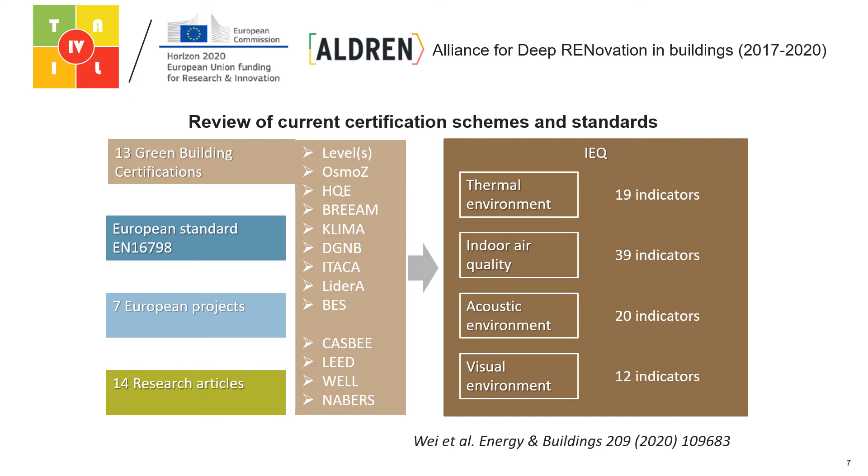And we call this rating TAIL, and the name of the scheme is coming from the four major components of indoor environmental quality, which are thermal environment, acoustic environment, indoor air quality, and luminous visual environment. Each of those components is rated based on four categories of quality, from category 1, the highest, to category 4, the lowest. This classification follows the one proposed by the standard EN 16798 that is supporting the EPBD, or Energy Performance of Buildings Directive.

And the quality of each is categorized based on these categories and given a color from green to red, where green indicates the highest quality. And then, depending on the quality of the four components of indoor environmental quality, the overall indoor environmental quality is determined, and it is characterized by the Roman number in the middle of the scheme, the Roman number and the color.

And of course, the Roman numbers follow the categories between 1 and 4, where 1 is the highest and 4 is the lowest. Of course, we would like to know the relationship between the components of indoor environmental quality and how they affect or impact the overall indoor environmental quality.

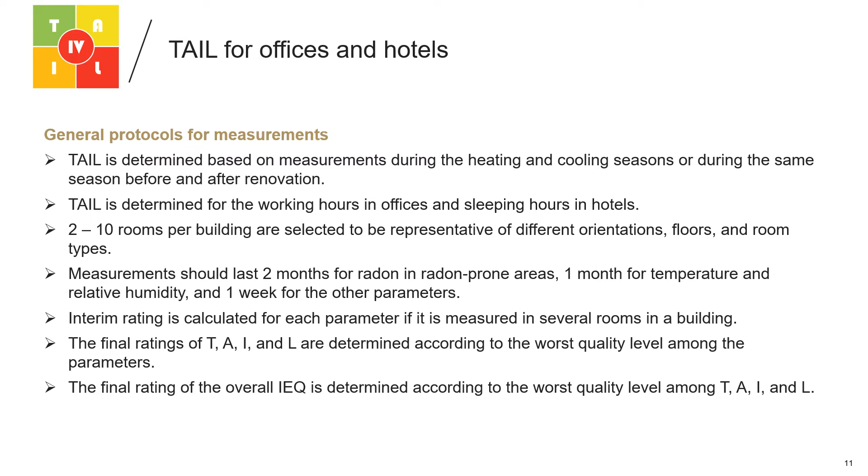However, we realized that during the process of construction and also renovation of buildings, there is one important part. We measured the performance of buildings using TAIL in different office and hotel buildings, and this is just an example of the parameters that were measured according to this methodology.

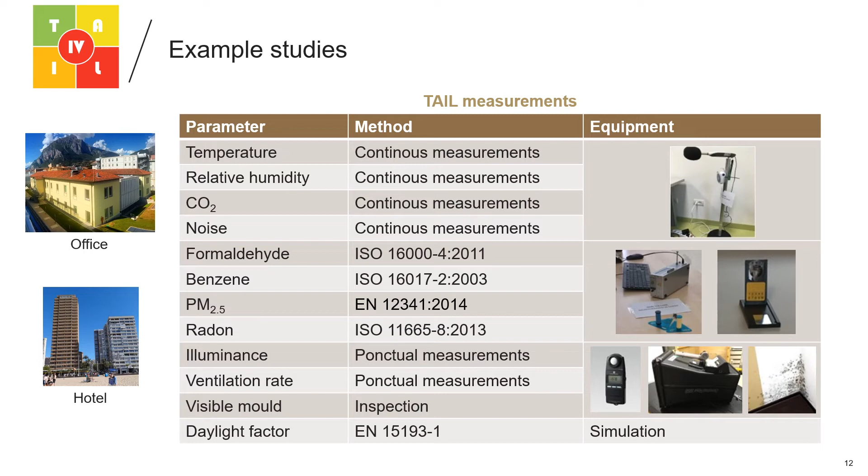And we determined that buildings perform differently with respect to the TAIL parameters. However, the overall indoor environmental quality could be identical, because it is decided by the worst performing component of indoor environmental quality.

To the test, the PredicTAIL tool. Well, this tool is once again allowing a prediction using modeling, and only modeling, of the parameters before the building is even renovated, to select the best scenario for renovation. And in order to test this tool, we defined

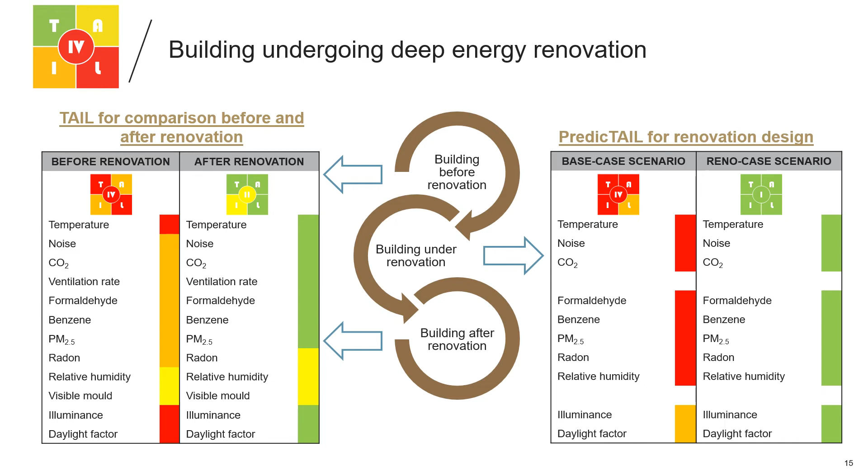four scenarios. Two scenarios in which the building is renovated to achieve the best energy performance or moderate energy performance, and two scenarios in which the building is renovated to achieve the best indoor environmental quality and moderate indoor environmental quality. Why did we do it? The major reason was that we wanted to find out whether the PredicTAIL tool would be sensitive enough to detect changes.

So in these scenarios, we selected realistic scenarios, but we made sure that there is a difference between those scenarios and that a difference could be expected. We wanted to see whether Predict TAIL would be sensitive enough to detect those differences. And as I said, we used different simulation tools to predict components of indoor environmental quality.

For the thermal environment, we used TRNSYS. For indoor air quality, we used MATHIS-QAI. For the acoustic environment, we used ACOUBAT software, and for luminous we used PHANIE. And the idea is that in the future we will be able to use any simulation tool to make this prediction. And the prediction was done for the entire year.

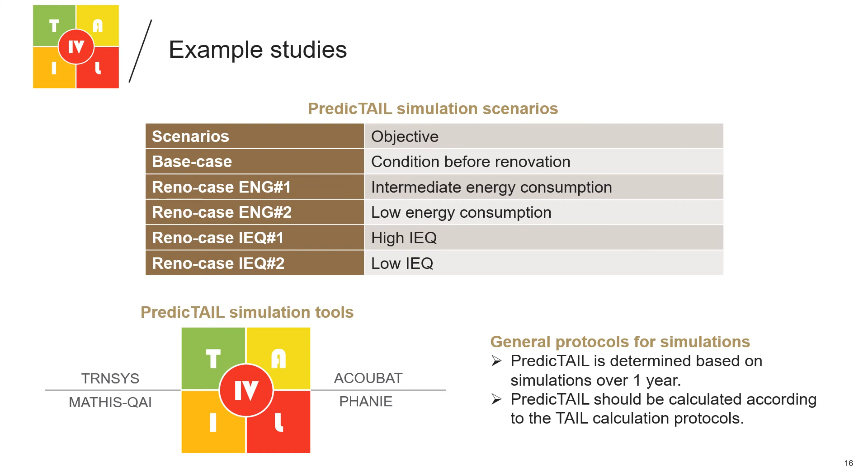Whereas in the case of TAIL measurements, the proposal is that the measurement should be done at least in the worst season, best in the heating and cooling season, and the optimal would be to measure in four different seasons, including also spring and fall.

And this is an example of the results of those different studies, which show that the tool is actually sensitive. So going from the base case scenario to case 1, in the case of the energy or renovation scenario, and going to the best performing scenario for both the office and the hotel, for which the TAIL measurements were done before, we see that there are changes in parameters.

So the tool seems to be sufficiently selective to allow the designer to select the best or the optimum scenario with which they would like to continue in the process of renovation.

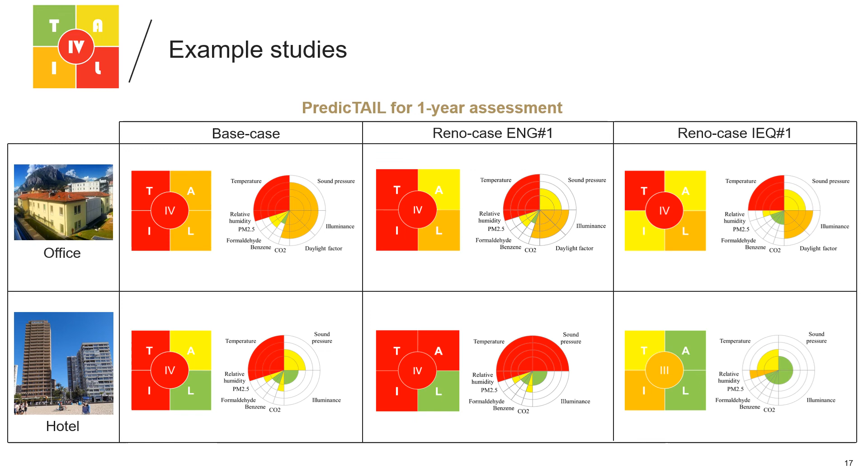Well, if you want to read more about TAIL and Predict TAIL, there have been several publications. There are two publications in Energy and Buildings, which are summarized in the REHVA Journal, issue 2 of 2022, this year, on TAIL and Predict TAIL, the tools for rating and predicting indoor environmental quality in buildings, and it can be downloaded for free from the REHVA Journal web pages.

Concluding, we developed TAIL and Predict TAIL. TAIL is a rating scheme allowing rating of indoor environmental quality in buildings under actual use. So it is a performance metric, and Predict TAIL allows the prediction of indoor environmental quality during the process of designing the renovation of a building. We expect that both will become a standard method for benchmarking indoor environmental quality in buildings.

Such benchmarking does not exist, although there are different certification schemes that use benchmarking, but they use different types of benchmarking and different methods, often not based on measurements, but on qualification of certain elements that exist, providing the credit method. And it's also expected that the use of both tools, the rating scheme and the prediction tool, will lead to a general improvement of indoor environmental quality and of the entire process of renovation of buildings that is now taking place.